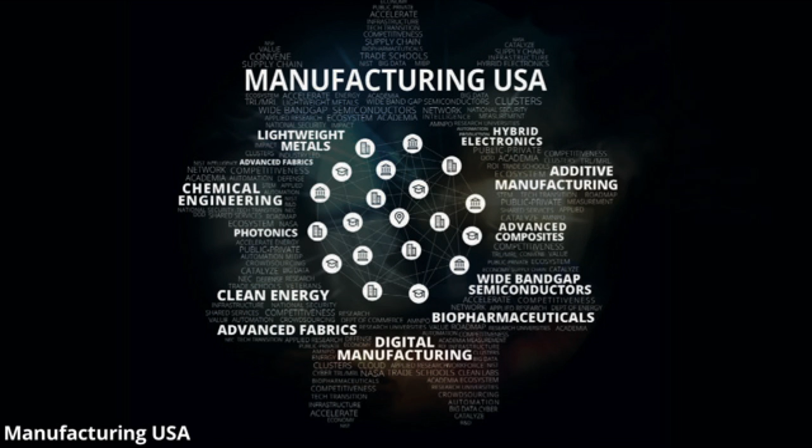We're also part of Manufacturing USA, a national network of Institutes for Manufacturing Innovation that focus on different technologies you'll probably hear about over the next couple of days, things like robotics, advanced flexible hybrid electronics, and the very most recent institute, bio 3D printing, so 3D printing of organs and things like that.

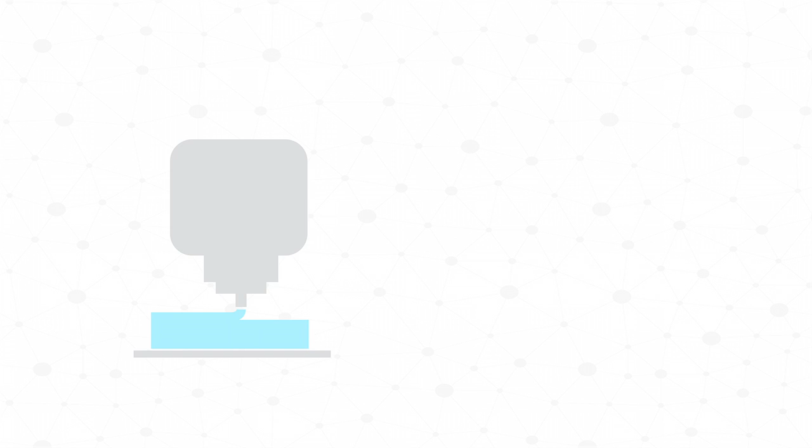So, 3D printing. At this point, if I asked everyone to raise their hand if you've heard about 3D printing, I'm pretty sure everyone's hands would go up, right? It wasn't always that way. It used to be about 30% of the room, but by now we know that 3D printing is a layer-by-layer additive technology that allows us to design in the cloud and create a 3D physical item.

But I want all of you to think about right now, just in your mind's eye, imagine something that you could 3D print, whether it's on your body, in this room, in your home, or in your companies. I want you to get that picture and maybe sketch it down or write it down, because we're going to come back to it later. Has everybody got something?

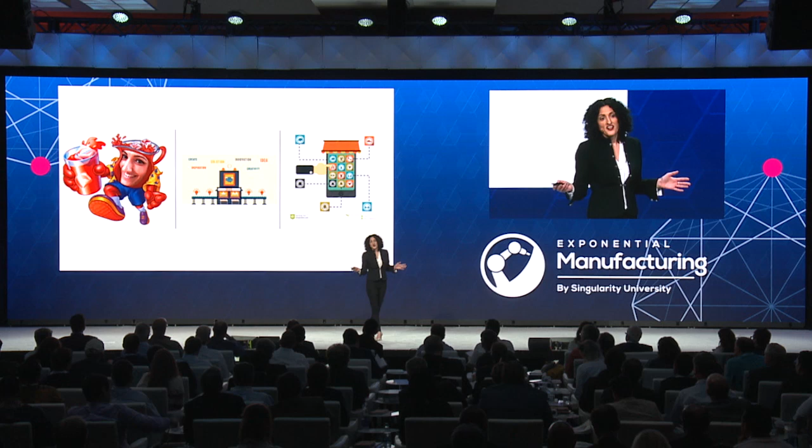I don't know if you recognize the person on the left, but that's me. I used to say when I first started in the 3D printing industry, I not only drank the Kool-Aid, but I made it and I handed it out to everybody. I was particularly excited specifically around digital local manufacturing hubs and this idea of online digital stores. I thought this was happening immediately, and I was really excited because I wanted to make umbrellas.

So when I first got into the 3D printing industry, I was in Chicago. I go to the Innovation Hub. I have this design for an umbrella that's not going to turn inside out in the rain, that's not going to break, it's not going to poke you in the eye, that's made with recycled ocean plastic. It's completely 3D printed, and it's got an embedded sensor in it, so if you lose it, you can find it with your iPhone.

And I thought I was going to print that. I was going to prototype that at the Innovation Factory. I was going to print it on a desktop 3D printer, and I was going to mass produce it at these digital manufacturing hubs all around the world. So no, I wasn't, right? My bubble was burst, like many of us, because at the time, the technology—specifically the speed, the cost, the price of the technology, the materials, the strength—they just weren't there.

And we're there because a lot of 3D printing manufacturers are starting to really make good on these promises of moving from prototype to production. This is a really good example: Fast Radius. Fast Radius is a global 3D printing distributed manufacturing company, and it's partnered with UPS.

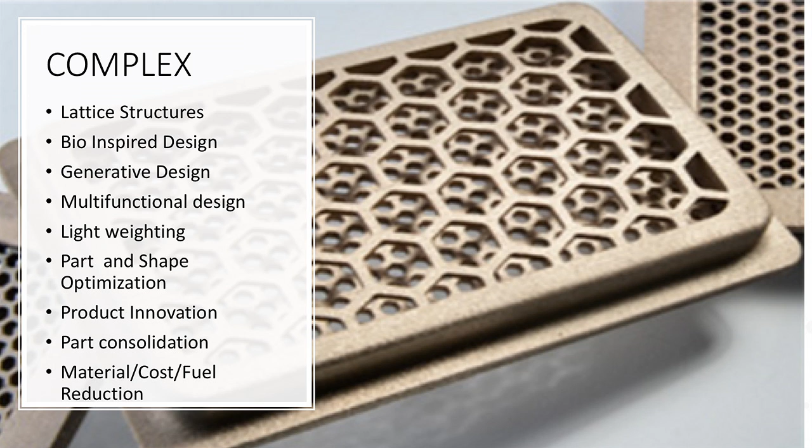So why? What makes this technology not just evolutionary, but revolutionary? I'd like to say that it's kind of 3 core C's. The first is that it's very complex — because we no longer have to rely on designing for manufacturing, we can design for function.

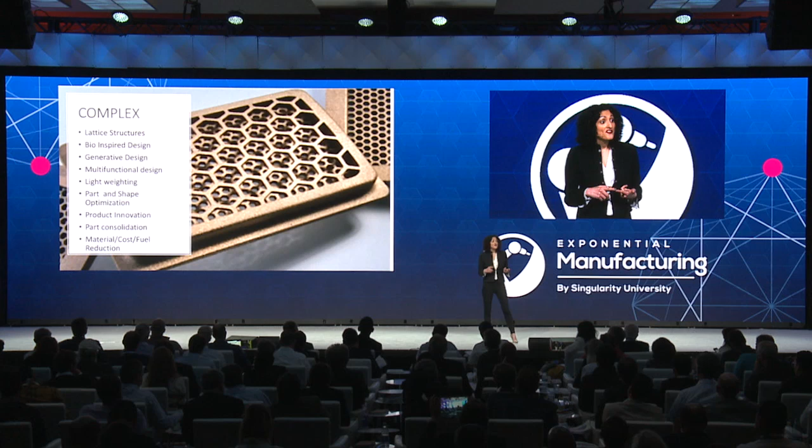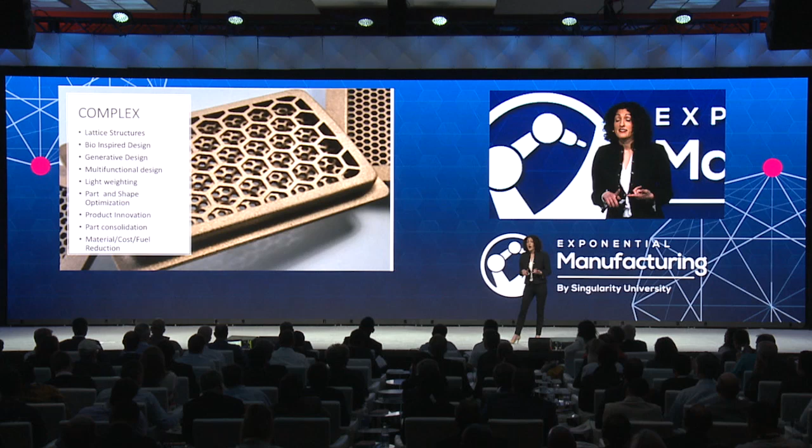So we can start designing products that we couldn't do in any other way. We couldn't injection mold it, we couldn't CNC it, we couldn't form it. Things like using lattice structures, biomimicry, generative design, where an algorithm actually creates the design for you. And using those design advantages to lightweight our products, to customize and optimize them, and then to see cost reduction, energy efficiency, fuel reduction.

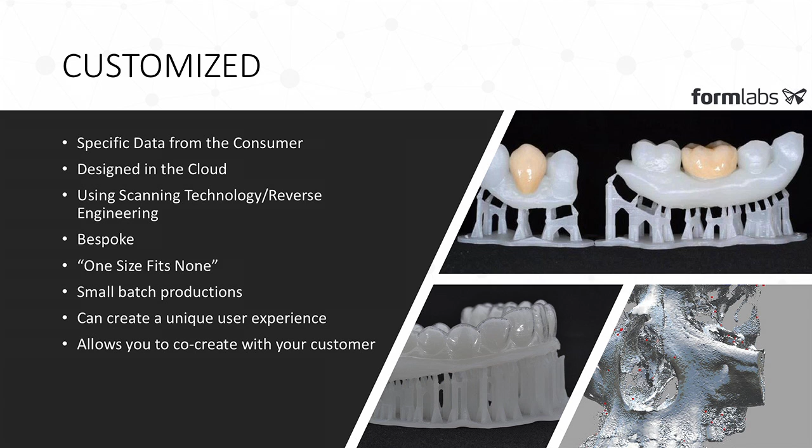The second is that it's customized. Who's heard of Invisalign braces? Every single Invisalign brace is 3D printed. Why? Because it needs to fit directly to your teeth. So customization is a great place we can use 3D printing.

The dental industry is now starting to look at dentures. Materials have evolved, and now we can do 3D printed ceramic and ceramic bone. So as the materials evolve, we can customize new things.

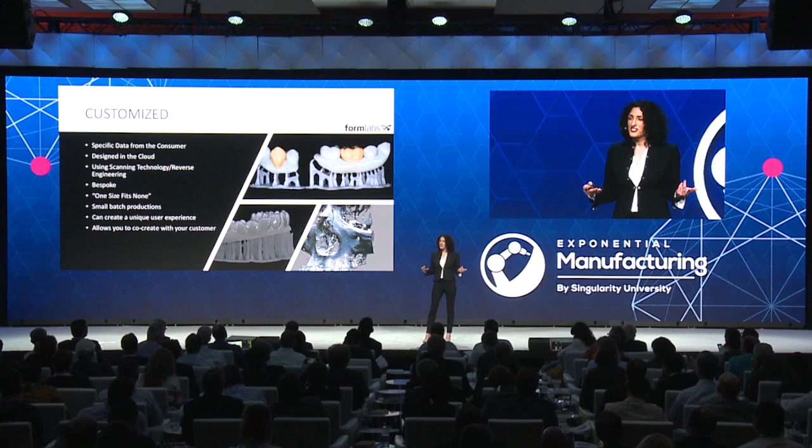And it's a one-size-fits-none model, right? Where it's about small batch production, creating a unique user experience. It's been used a lot in the medical industry, I'd say the most, for things like prosthetics or customized implants. I think just a couple of days ago I heard we're now 3D printing cartilage.

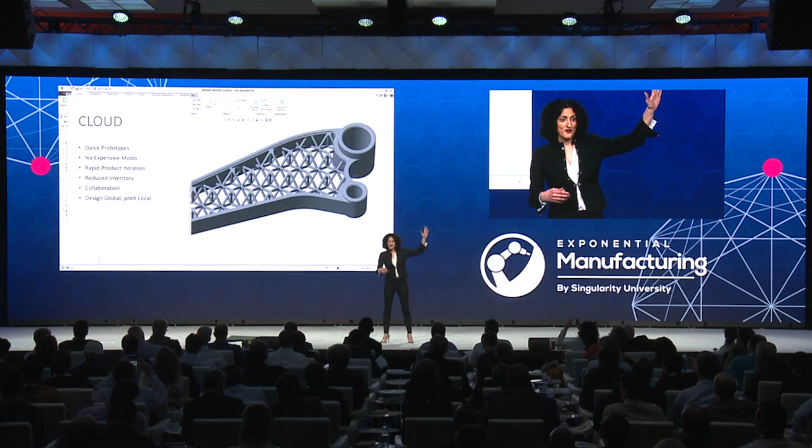And the final one is the cloud. The cloud also connects with cost as well, because you don't have to make things in molds — you can just design it on your computer and print it on your printer. It allows for rapid iteration.

You can make quick prototypes. You also can have reduced inventory, as I mentioned with Fast Radius. And it's also a cool tool for collaboration — there's people designing and co-creating on the cloud from New York to Nepal, creating new 3D printed shipping containers for a resource center for disaster relief.

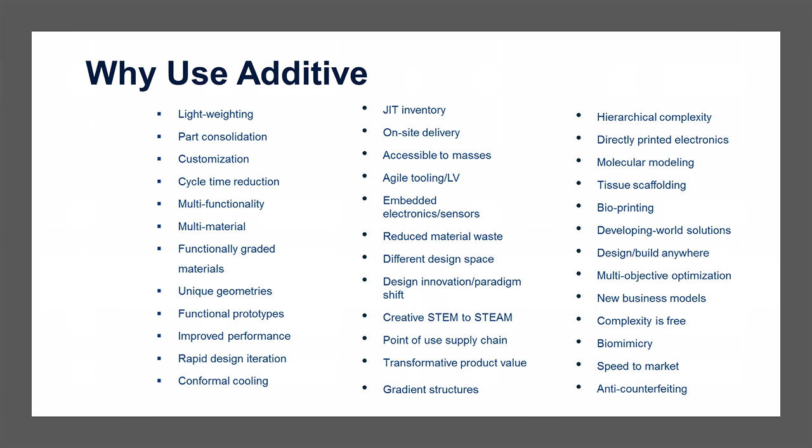So why use additive? Well, at America Makes, we had a session with about 30 different experts wanting to understand why they were using additive within their organizations. The why is really important — it's the beginning of understanding the how.

Understanding whether or not you're going to use this for product innovation, for cost reduction, for supply chain efficiency, is key to understanding what technologies you're going to use, what materials you're going to use, and how you're going to train your workforce.

So what's new? There's a lot of things that are new. I will say that just this morning I woke up and it turns out we have 3D printed a mouse ovary, and that mouse has given birth to babies.

So we could talk probably all day long about all the new things, but I just want to focus a little bit on the industrial manufacturing newness and how we're really moving from this idea of prototype to production and making the factory real. So Carbon — many of you are probably already familiar with the CLIP technology.

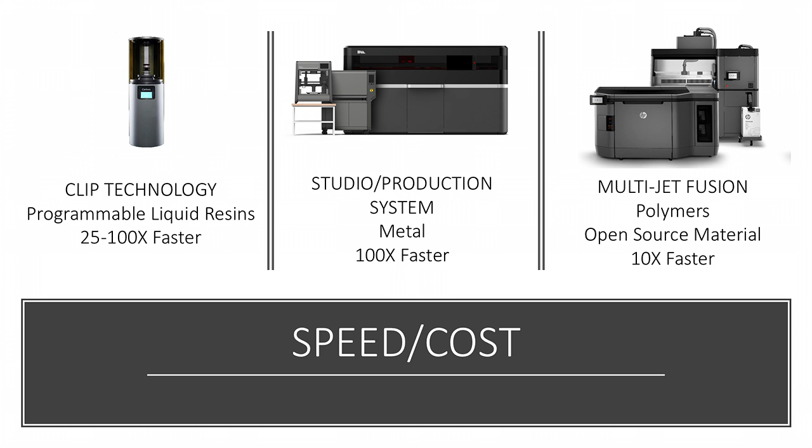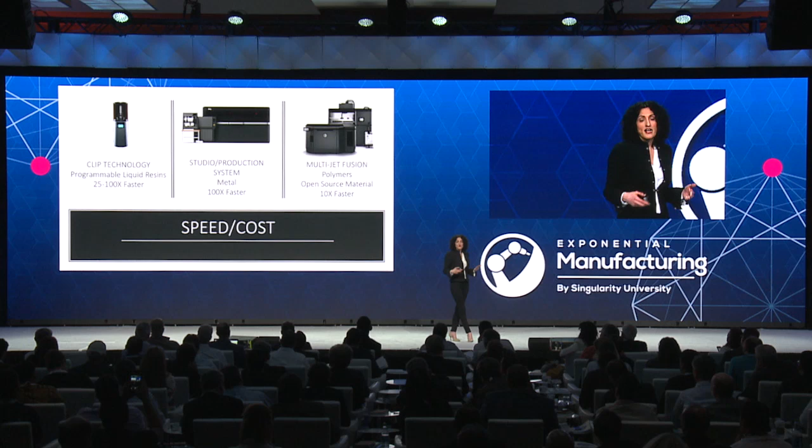Desktop Metal and HP, I kind of call them the new kids on the block, and they've done a lot around speed and cost. Carbon now can, using light and oxygen, emerge a part that comes out 25 to 100 times faster. Desktop Metal at Rapid was showcasing they have both a studio and a production system. The studio system is a metal desktop 3D printer you can use for your engineers, and it's low cost. Their production system is 100 times faster than previous metal systems, incredibly fast in comparison, and much less in price.

HP is also looking at multi-jet fusion and expanding around polymers. They also have open source materials, meaning you can really advance this technology by keeping your machine open sourced.

3D Systems and Stratasys are both thinking about integrating robotics to increase speed and quality. 3D Systems has something called the Figure 4. It's an SLA machine, but it's a cluster of SLA, using robotics and automation, and essentially the robotic arm will change the build plate, change the material, clean the parts, and test the quality.

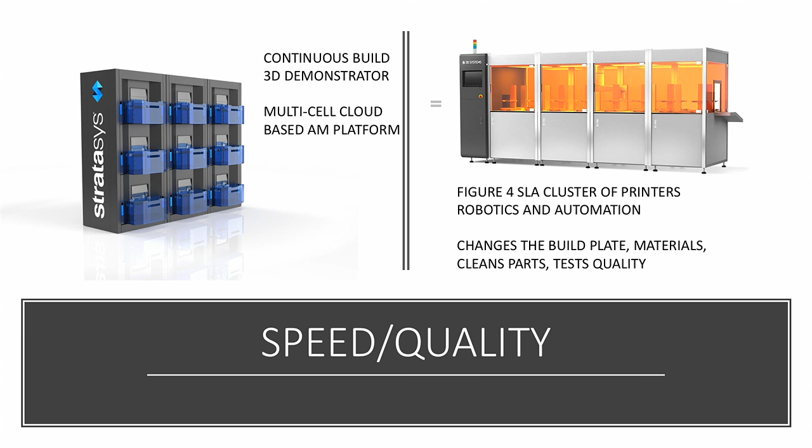Stratasys is also looking at this continuous build 3D demonstrator. They just announced it at Rapid. It's a multi-cell cloud-based AM platform, so again you don't need a human. This is really around factories of the future, 3D printers that are printing without the need for anyone there.

On materials, it used to be that maybe there were 12 to 18 materials we talk about, but now it seems like there's always a new material popping up. We're printing in glass, metal, ceramic, cement, and composites.

My two favorites over 2016 and 2017 are graphene. Why am I so excited about graphene? It's because it's really strong. It's 1 million times thinner than a human hair, is how thin you can print it. It's 200 times stronger than steel. It's light, so 3 grams of it will fill a football field, and it's conductive, electrically and thermoconductive. So lots of opportunity there.

The second is Essentium. So many of you may be thinking, well, how do I know that this part may be comparable to an injection molded part? Essentium just came out with material modifications where they essentially put carbon nanotubes on the resin or filament that comes out, and that strengthens the Z gap, achieving strength 98% as strong as injection molding. So essentially, you're getting parts that you potentially could replace injection molding with.

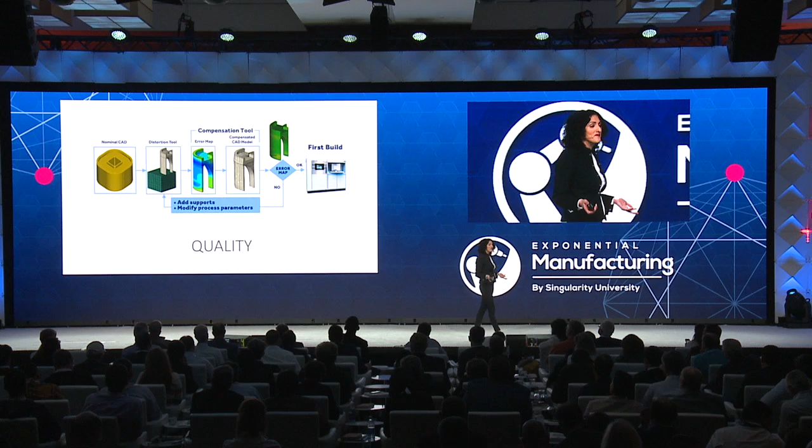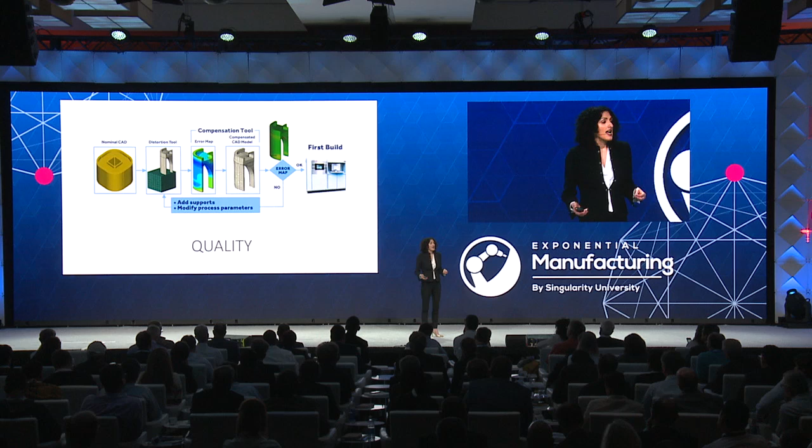On quality: America Makes is really interested in what are the barriers to advancing the technology and where are the gaps. We noticed that quality and process are real barriers, making sure the part is strong and doesn't have any defects, especially in metal 3D printing, where we're seeing rapid expansion across aerospace and automotive.

When you sinter metal, then heat it up and cool it, you get what's called thermal distortions, so there are distortions in the part. You have to make sure those distortions don't affect the strength and quality of your part, and sometimes it takes 10 to 15 tries to design your part so you don't get distortions.

Big aerospace companies don't want distortions in their parts. So a group of normally competitive companies—GE, Honeywell, and I think it was UTC—came together and said, we need to solve this problem, we want parts that we know are going to have high quality. They created software that monitors for thermal distortion and allows you to create parts quicker, 75% quicker than previous, of higher quality.

I would definitely say that design is one of the biggest barriers that you'll face in your organization to integrating 3D printing into your companies, and we have seen that across the board. A design-for-additive mindset, understanding not just how to design for manufacturing but to design for additive and to leverage the power of that technology, is critical.

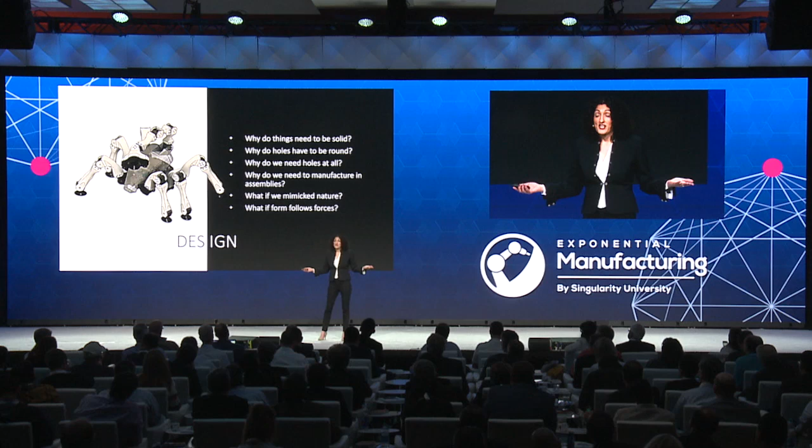It's about changing the mindset and asking new questions. Things like, why do things need to be solid? Why do holes have to be round? In fact, why do we even need holes at all? Why can't we print things in complete assemblies? Why do we need to even manufacture assemblies? Why can't we print things in one part? And what if we mimic nature more? What if form follows forces?

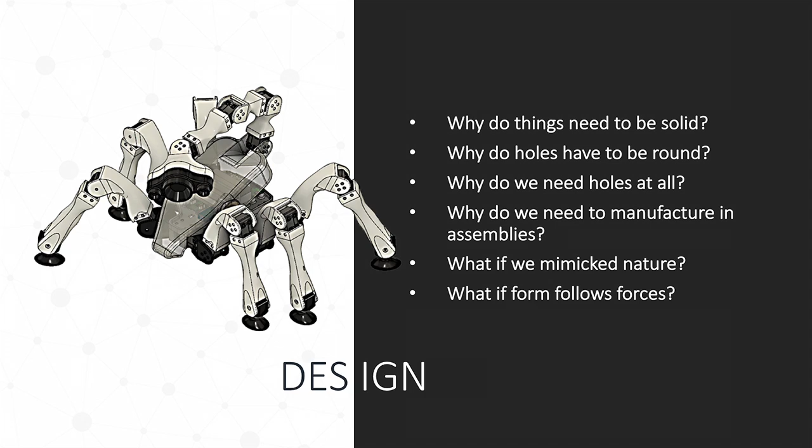So this little guy right here, it's a 3D printed hexapod robot. We use that at America Makes to teach design for additive manufacturing, because it's an integrated systems approach to understanding the system—not just design for additive, but the system around design for additive.

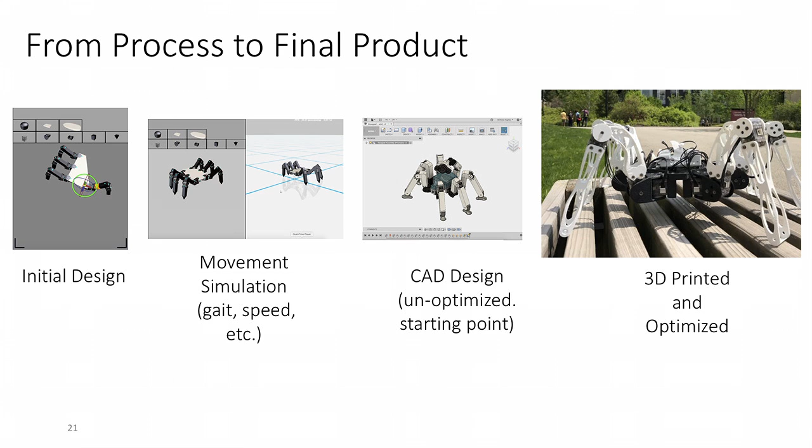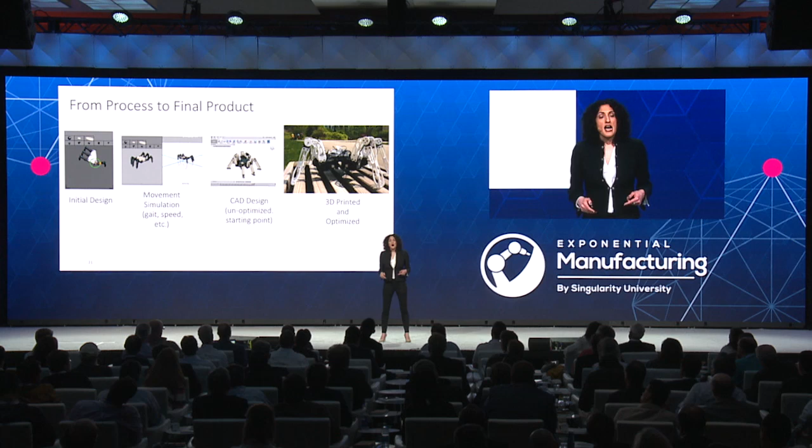You can take an initial design, you can start looking at movement and speed, and then you get this CAD design, and then you use all of those design elements that I talked about earlier, like lightweighting and optimization, to make the part lighter, to keep the robot moving, to keep it strong, to think about how it might start gripping things, and then to start integrating different technologies to think about, well, what if we don't want wires? What if we wanted to use embedded sensors and embedded electronics and just print this thing in one part? It's a learning tool to get you to start thinking about how you might use additive.

We have a program called the Academy. It's a project-based learning experience that's very hands-on, built on a capstone. Right now we're working, for example, with the Air Force, which is really interested in how to optimize engine parts. They want to use hands-on experiential learning to figure out exactly how to optimize their engine parts. And we work with companies to think about how they want to use additive, and how we can take them through the design process to get them to that place.

Who thought of glasses? Anybody? Yeah? I'm just curious. Somebody throw something else out. Somebody's got to throw something out. You—did you think of anything? No, but you have glasses on, so... All right, well, I was playing around with this audience participation thing, not sure how it was going to work.

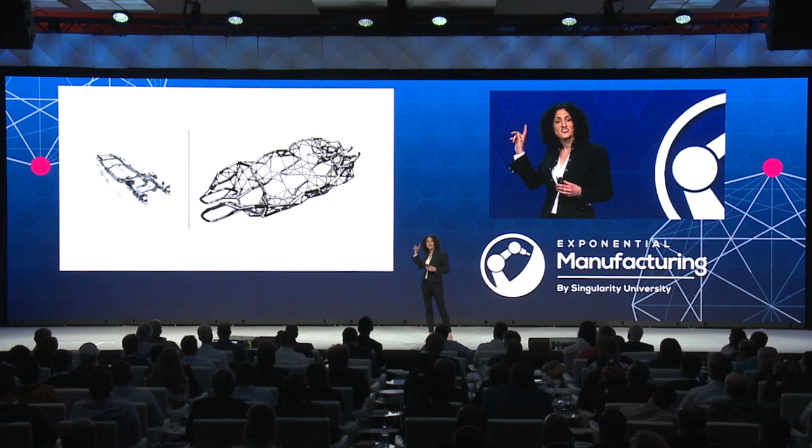So this is a chassis. On the one hand you have a regular chassis, and this is a 3D printed chassis that uses generative design to create it. It looks radically different.

So how are companies and industries using additive, and how might you think about how you're going to use additive? I think when you think about how you might use additive in your company, the first thing to think about isn't what part am I going to produce, or how do I produce this part—it's about what capabilities am I going to develop. And it starts with the why. Why are you using it? Are you using it for innovation? For cost reduction? For efficiencies or inventory? So you start with the why, and then using the why, you start building your capabilities around it—specifically what processes, what machines, what materials, how you're going to train your people.

On the other side of the spectrum, we have the Navy. They're interested in 3D printing specifically for repair, refurbishment, and replacement of parts on ships, because years go by and ship parts break, and the molds and tools and dies that were used to replace them were 20 years prior, so to fix them is really expensive. So how do they start using 3D printing and reverse engineering for sustainment, repair, replacement, and refurbishment of parts, and making those decisions?

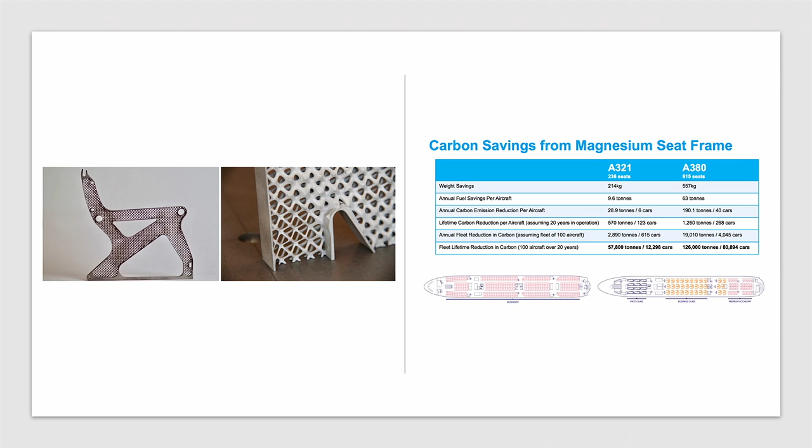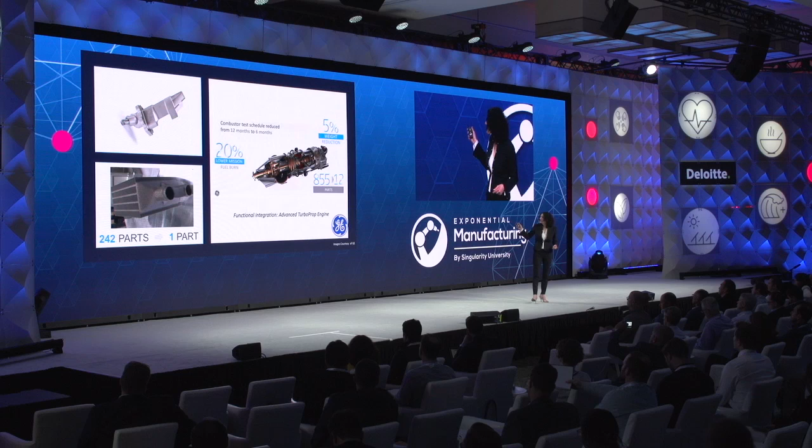GE is the poster child for this. Everyone probably knows about the LEAP engine, which had a component part that got them into the 3D printing space. They're looking at component parts. Over there you'll see the heat exchanger, where they've taken 242 parts and merged them into one build. And then we have this functional integration of an advanced turboprop engine.

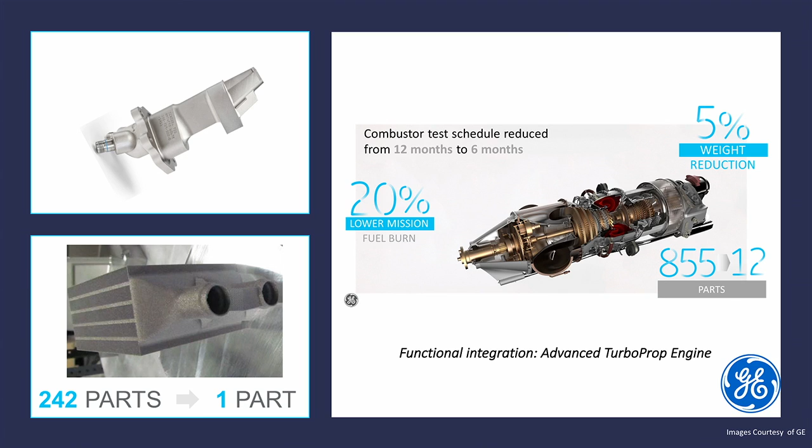This one was 855 parts. Through lightweighting it and taking out assemblies, they decreased it to 12 parts. It saw a 5% weight reduction, which turned into 20% lower fuel burn, which certainly turns into a lot of cost savings from fuel costs.

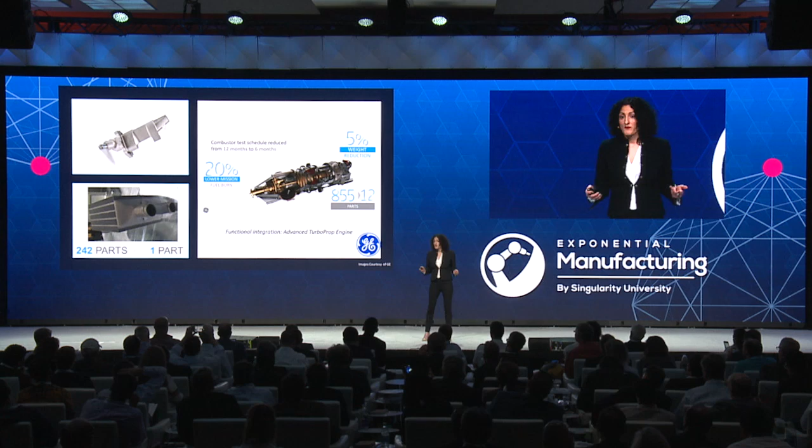And then finally, 3D printing in space. Many of you may know that Made in Space has sent a 3D printer to the International Space Station, and we're 3D printing tools for astronauts, because a wrench might break in space, and instead of calling down to Earth and waiting 6 months for it to fly back up, they can just print it on the space station. But now we're thinking about how do we take advantage of zero gravity? Why do we need gravity?

So they're looking at fiber optic cable, because it turns out that if you print long strands of fiber optic cable on Earth, they warp. But if you print them in zero gravity, you don't deal with warping. Now, take that one step further and think about what if we start sending bots out to mine asteroids for platinum, uranium, plutonium, titanium, or whatever's on those asteroids, and then use that to start manufacturing in space with fully automated systems that use robots plus 3D printers to produce parts. We can start seeing a future that we had previously only imagined being real.

So I believe the future lies in the convergence, the integration of robotics, next-generation flexible hybrid materials, AI, the Internet of Things, and 3D printing all coming together. An example of this with our sister institute, NextFlex, is looking at 3D printing plus flexible hybrid materials and embedded sensors, and they're doing this for human health and performance monitoring.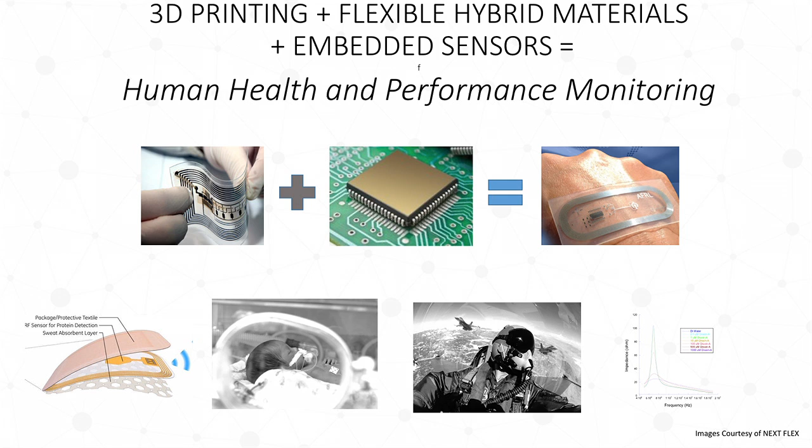Take that one step further and add robots. Just recently, researchers out of a university in the US announced that they started to print 3D printed bionic skin, allowing robots to feel with this 3D printing robotic skin, which works for things like surgical planning or robots in surgery, but also allows us to think about robots interacting with each other and how these sensors might start helping them to feel.

So I wanted to end by going back to that original vision of local and digital manufacturing places where we could print on demand. Amazon a couple of years ago started talking about being able to print on trucks. So if you can imagine a 3D printer plus a robot in a truck can get you things on demand, and then a drone can pick that thing that was created on the truck and fly it out to wherever you are.

And I will end with a little Dr. Seuss poem, which is: oh, the things you can print. Can you print it here or there? You can print it anywhere. On a truck or with a drone, maybe even one day in your home. Thank you.